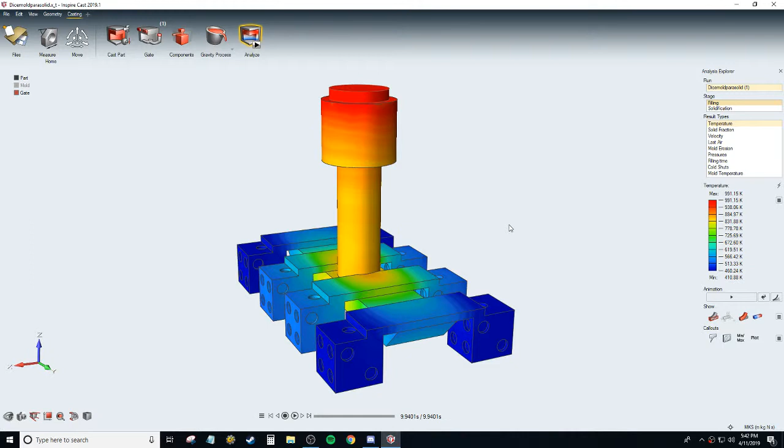All right, this is the fluid dynamics and solidification analysis for my mold that I sent to VoxelJet for Lokensgaard's PDD 212 class. I just finished up the simulation, so let's watch through.

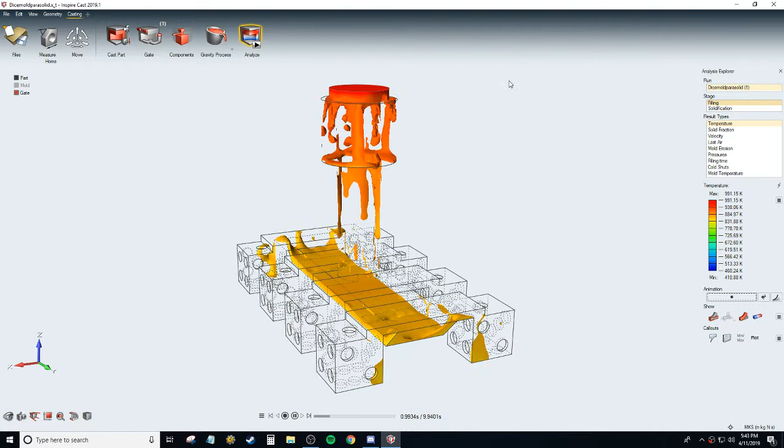I set it to 10-second fill time. It's kind of annoying how much it's splashing right now. I don't think this is actually how it would be. I think part of it is up here, as you can see, my sprue in the software is significantly smaller than my sprue in the actual part. And I'm pretty sure that isn't helping anything.

Can I move it while it's playing? Yes, I can. It's just very slow. Good God. I wonder if it's rendering through my processor. That would make sense.

So as you can see, it fills up. It goes through the sprue. It fills up the runner, and it starts to go into the gates. The end gates are kind of messy. The flow isn't as laminar as we'd like. However, in here the flow's not bad.

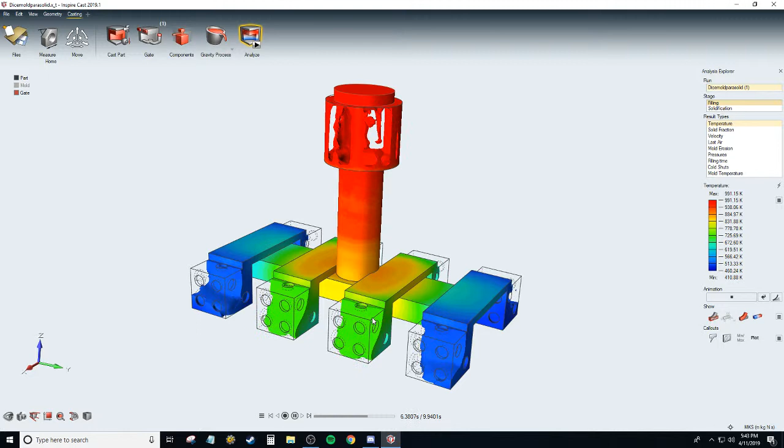It looks fairly steady. It makes me wonder if I might have been better off doing two separate systems of just four instead of one system of eight. Because you can see, like, it flows fairly well. There's definitely going to be some air bubble trappage there, but that's whatever. I don't want to say it's to be expected, but mistakes happen. This is a learning process. Okay, so that's the basics of how it's going to fill.

Looking at the solid fraction, it looks like the actual dice itself should be good, which kind of surprises me given the air that we have in these top corners, or theoretically would have. I'd expect there to be some more fill issues here.

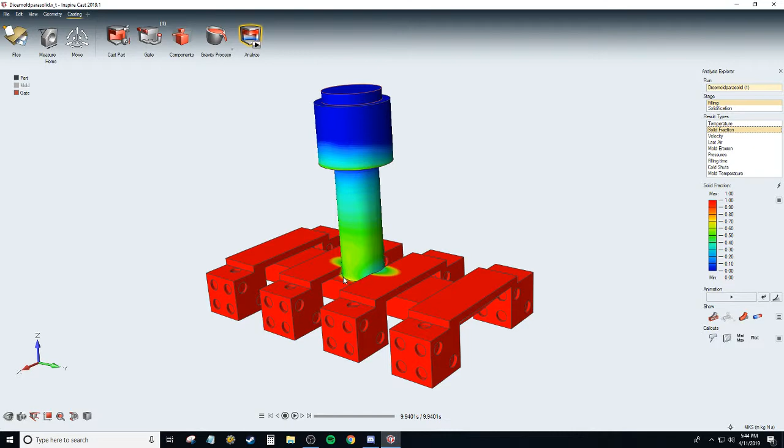We start to see that going into the sprue and the gates in the runner right by the sprue, we have some solidification issues, or some issues with it being solid all the way through. That's honestly not too problematic because that's all going to be scrap anyways. The gates are going to have to get snapped off and the dice sanded down for finishing. So anything up here not being solid isn't a huge deal.

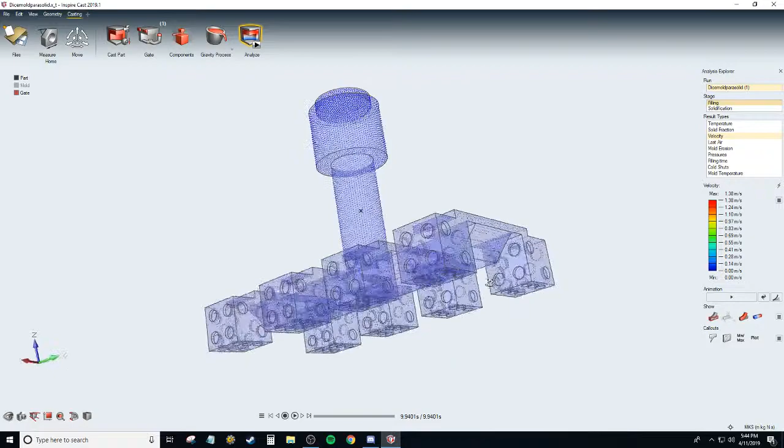Velocity. I'm guessing this data didn't go through properly because this tells me nothing. Unless I meant to play it, which isn't going to happen.

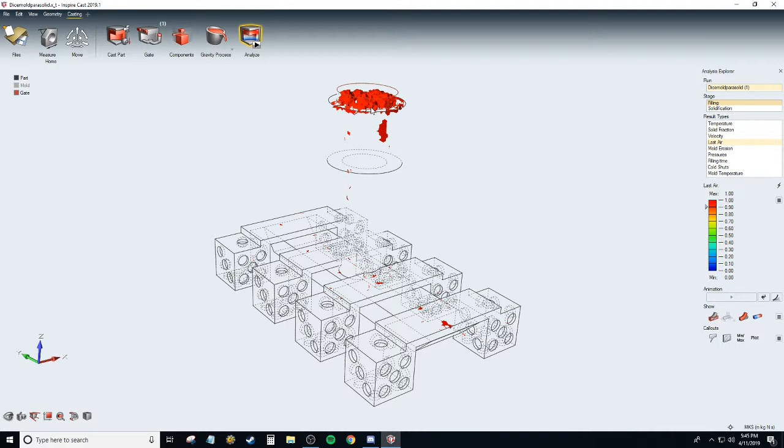Last air. Okay, so this is interesting. Earlier we talked about how I expected in the corners of the dice we'd be seeing some air pockets. It actually looks like in my runners I'm going to see some air pockets and then a bunch of air pockets up in the sprue. The air pockets up here, I'm genuinely not at all concerned about. They're not going to affect the end result too much because, like I said, that's the sprue that's all going to be discarded.

It looks like all of the other air pockets we have are also going to be in the runner. I don't see any of them in the actual dice. They're all in the runner. So that's perfectly acceptable. Those are acceptable margins of error. Those are the places I'd really prefer this stuff to be, anyways.

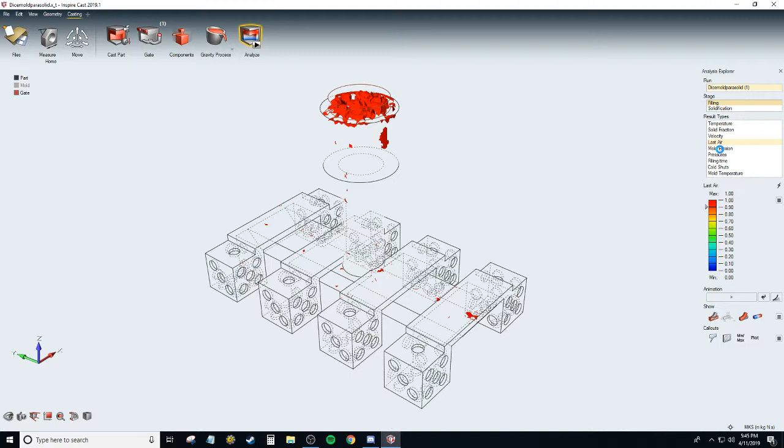Mold erosion. Oop. Okay, so we're gonna get a little bit of mold erosion right at the bottom. That's to be expected. We're pouring molten metal right into it. But we're not going to get any other mold erosion. So what that tells me is if I could redesign the dice to either not have the nubs, or even just change up the manufacturing process so that those nubs were drilled in rather than cast, theoretically we could turn this into a production scale system for making dice. Theoretically.

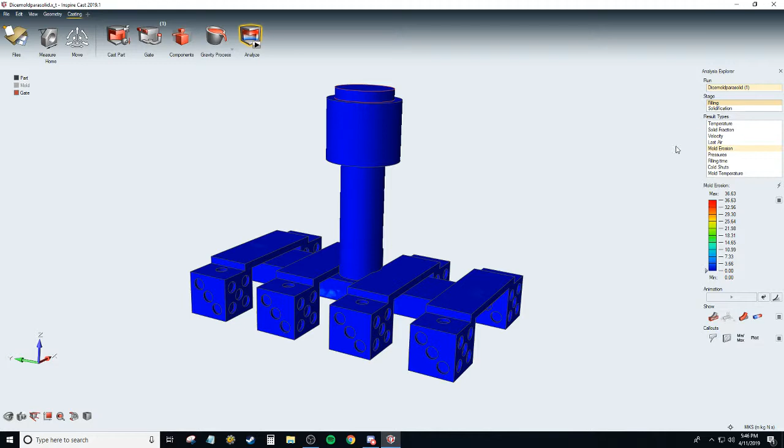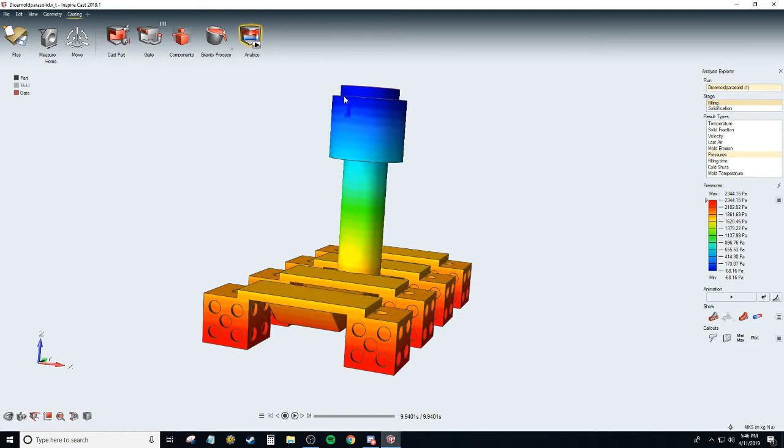Pressures. Okay, I don't fully know how to interpret this. I'm kind of surprised not to see a spike in pressures around each of the individual nubs. However, this does seem to make sense. There'd be the most pressure at the very bottom, the least at the top. There's a little spot right up here that I don't really know what to make of. But again, it's in the sprue, so it's not extremely critical to the end quality of the mold.

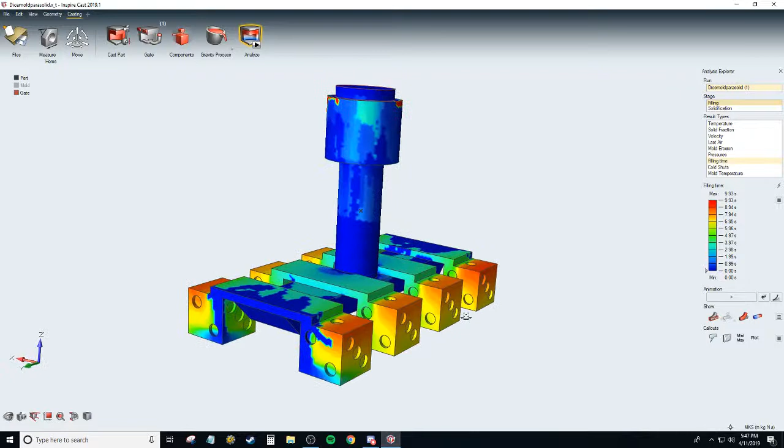Fill time, oof. This is ugly. This is absolutely ugly. So the middle dice aren't bad. What I'm looking for in the middle dice, from how I understand how this works, is you want it to be a very smooth, very even transition of colors. So you see, on these two middle dice, and even this third one, it's a very smooth green to yellow to orange to red.

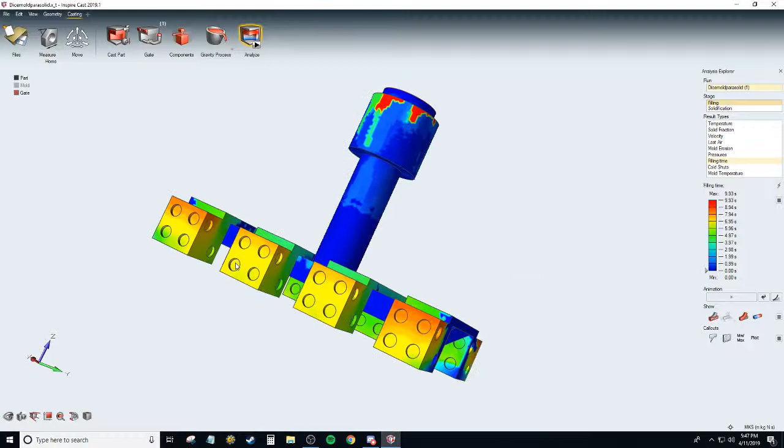There's bands, but they're not too bad. And even on this side, you can see in these corners, it's pretty smooth. But a couple of these dice have some really awkward corners where the fill time to the rest of it is very sharp.

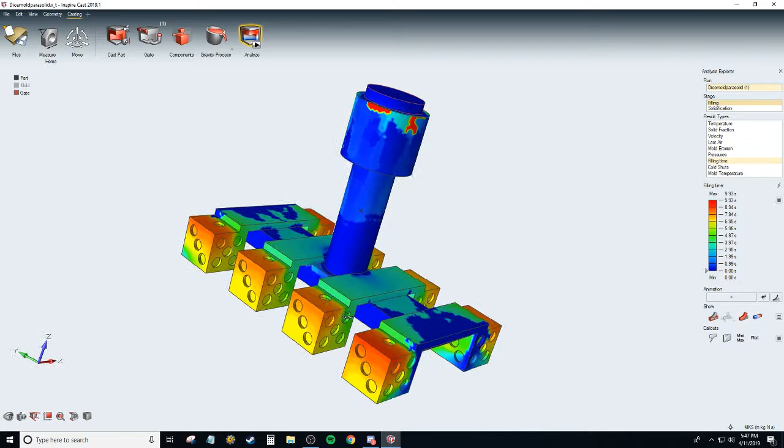I can see that causing a lot of problems with fracturing, a lot of problems with filling in properly, with air pockets getting trapped. I'm going to ignore the issues in the runner and the gate system. As you can clearly see, there's a lot of odd sections in the runners and the gate, and I think something I could have done better to help prevent it is on the gate here I have these angles.

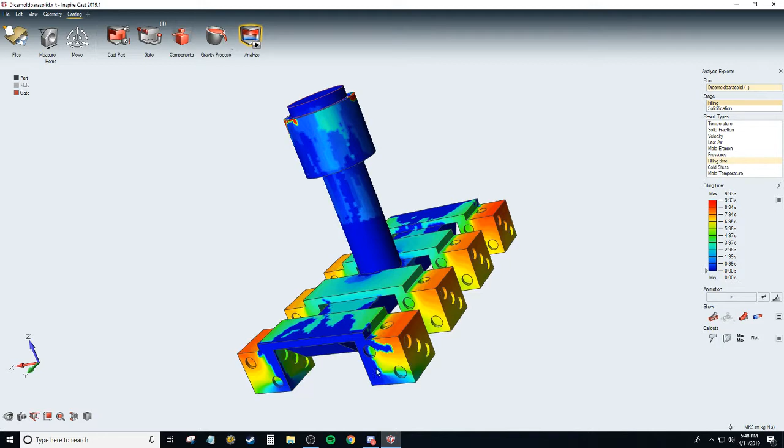The angle was put in from one of the pamphlets we read in class, but I think I either needed to do a steeper angle or a more shallow angle, because it looks like the flow of the metal broke on the angle and splashed up and in. And when it splashed in, it created a very uneven and differential kind of fill. So that's something we could cut down in the future.

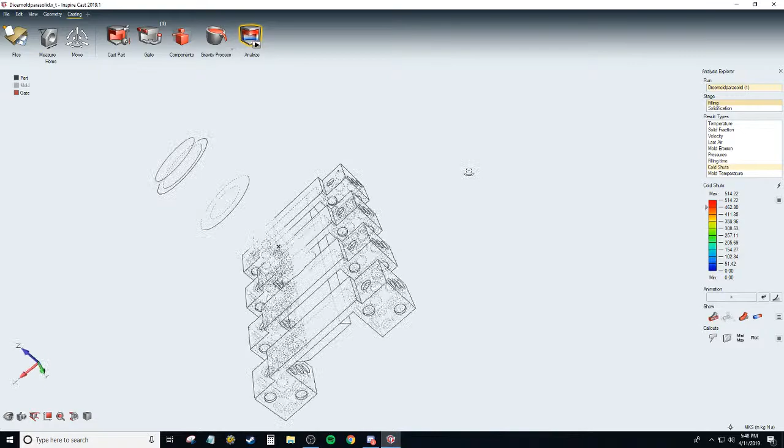Cold shuts. Okay. Oh, there's one. There's two. So it looks like there's two in that dice and none anywhere else, which I call a fat BS on. We all know that's not how this works. If there's cold shuts in one dice, there would be symmetrical cold shuts among at least the other dice on that side. That is good to note.

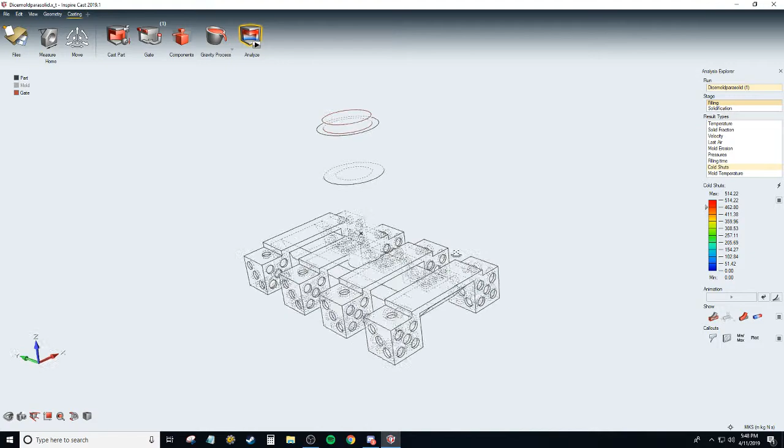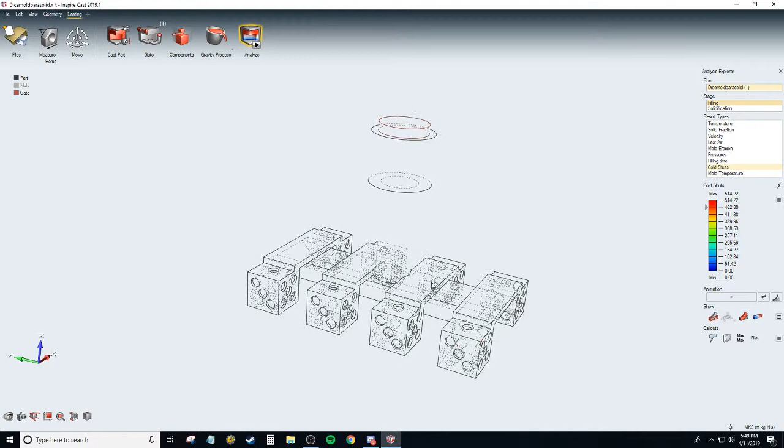I was kind of expecting this when I was thinking about the metal flowing over the nubs, and it looks like my suspicions are correct, because let's zoom in on those for a second. One cold shut is kind of away from it, but that's also where the metal would have been splashing into the mold. And then there's one down there by the nub, so it's not great, but it's to be expected. It was expected and predicted when I was originally setting this up.

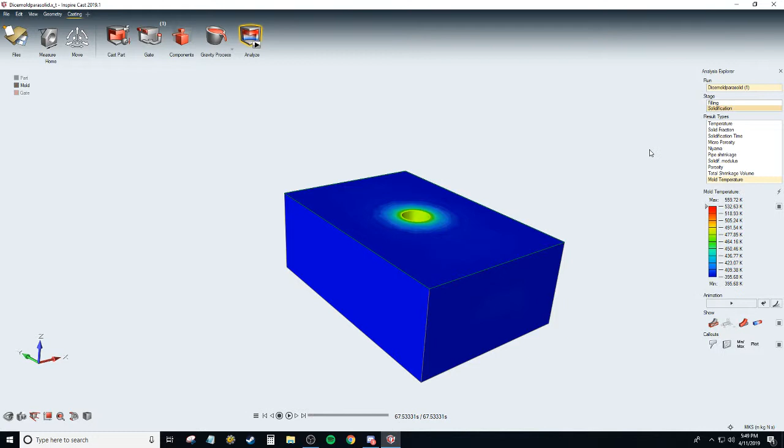Mold temperature, okay, so it shows me the actual mold. Yeah, that doesn't surprise me. I don't know how else to look into this, so I'm not too worried about that. So that's our filling analysis. Let's go over to solidification real quick. Okay, so we're going to have temperature. Temperature on everything looks good. The sprue's obviously going to be a little bit hotter. That makes sense. Solid fractions. Again, I don't see anything too worrisome.

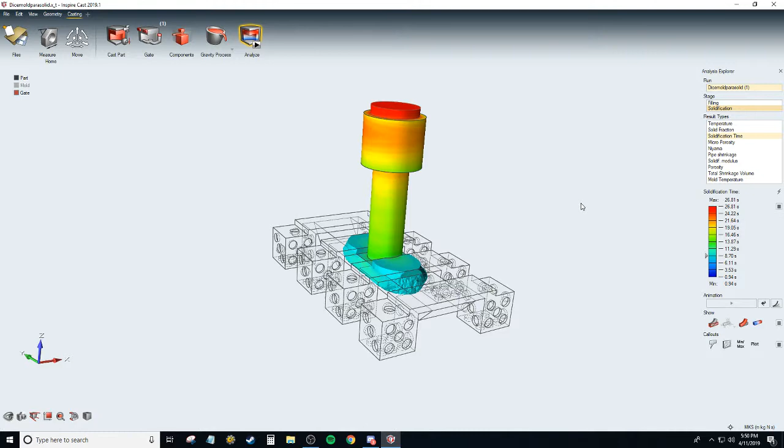Solidification time. I'm curious why I don't have a solidification time on the dice, especially seeing as the full analysis is done, so I should be able to see a solidification time. Oh, it's clear, so it solidifies immediately, which is concerning and not at all how this would work, but whatever. And then yeah, that's understandable.

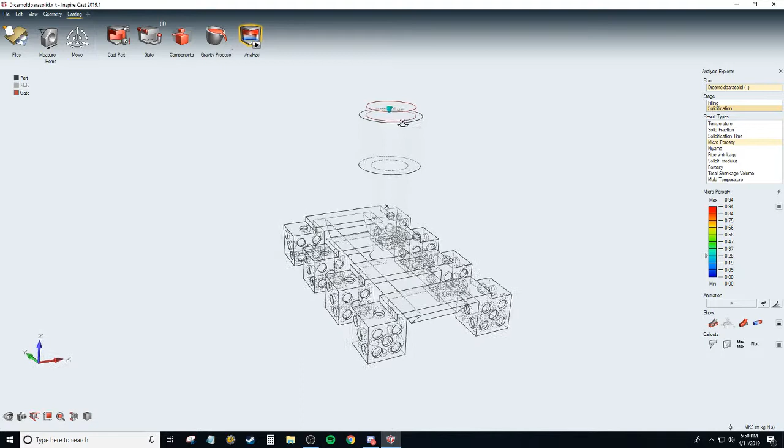Microporosity. It claims that the analysis was done for solidification, but it's very much looking like it just kind of quit. Because we've only got this nub here, unless that's saying that's the only spot that would have microporosity, which is to be very much expected, because that's the sprue. Ideally, we're going to fill all this up, and then as the dice shrink, the extra metal from the sprue will go into the runner and then into the casts.

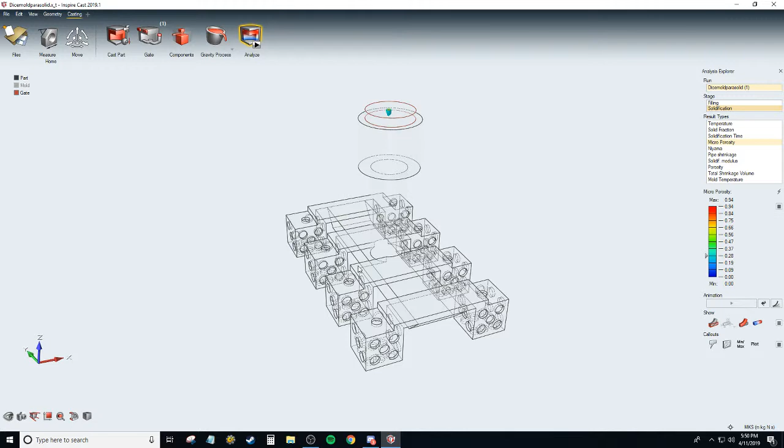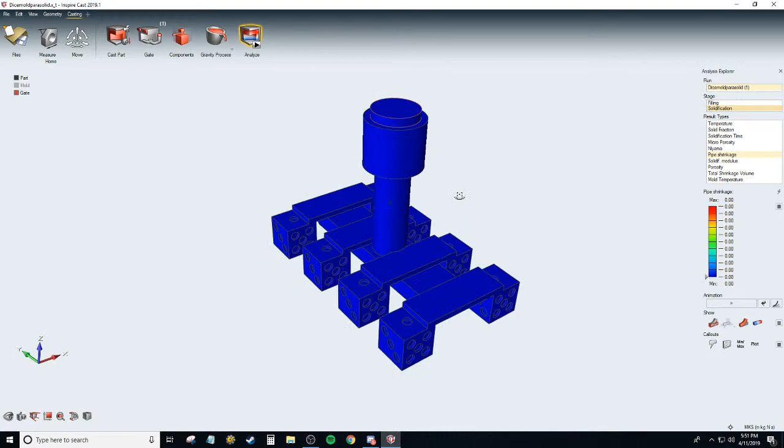I don't know what this means, but it looks good. I like when everything but my runner and my sprue are uniform. We didn't cover Niyama when we brought the guy in to explain this, but yeah, it looks good. I like it. Pipe shrinkage, I don't know what that means, but I don't see any of it. Solidification modulus. Okay, I see what this is saying. This is the nub that's going to kind of sink as this all sets and solidifies. We've discussed this already. That's to be expected, and it's actually kind of acceptable.

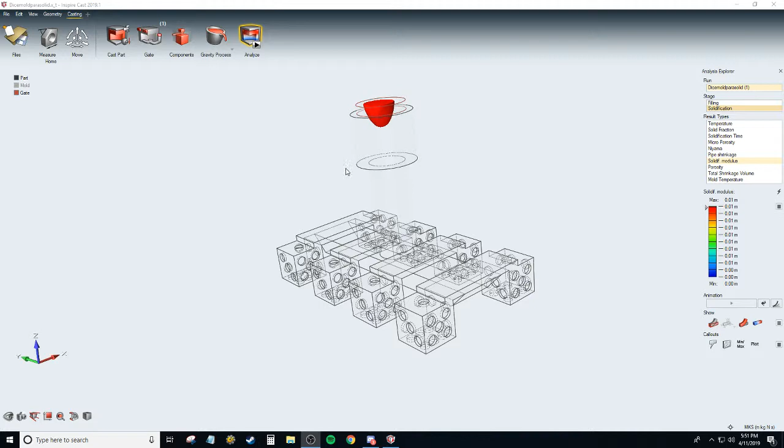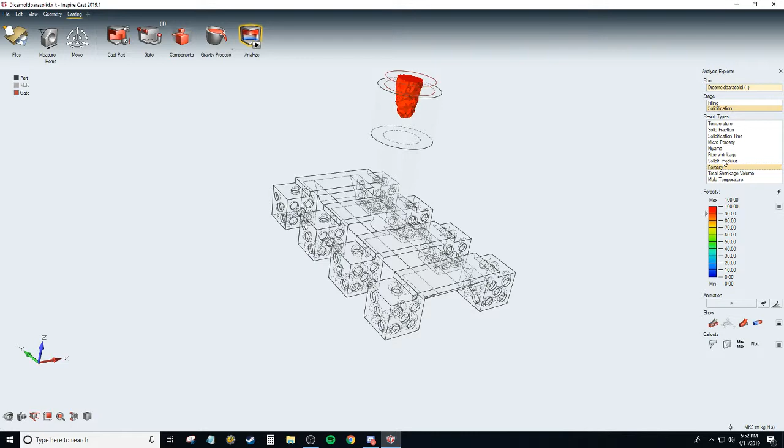It's the sprue. If we are going to have to control for shrinkage anywhere, we want to control that shrinkage to specifically that spot, the sprue. Porosity, again, we're looking at almost identical situations, which I'm perfectly okay with. Total shrinkage volume is almost spot on with all three of them. And then mold temp, again, useless information. I think the big three to look at are the solidification modulus, the porosity, and the shrinkage volume.

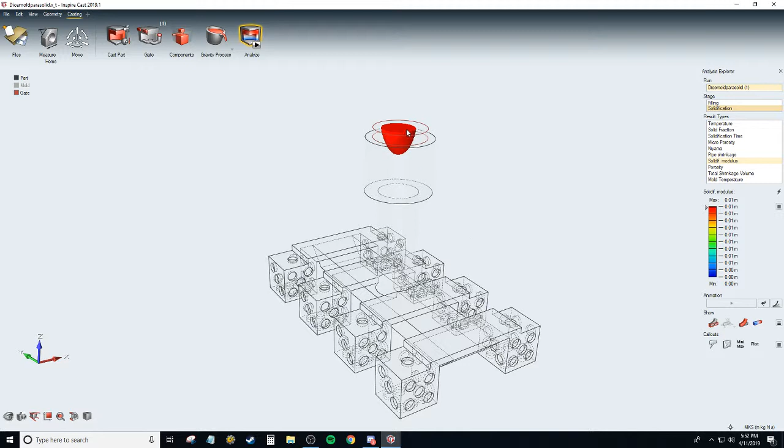We're seeing a very consistent pattern of this space up at the top of the sprue, or I believe that would be the pour cup. That space up there is going to have some major shrinkage. The thing is, though, I kind of designed it that way. Part of the reason I gave it such a long sprue and such a big pour cup is I wanted there to be that extra metal in the mold to fill in as the aluminum cooled. So if that's where we're going to get all our porosity and shrinkage, that's totally fine by me. So yeah, that's my analysis of the simulation of my dice mold.